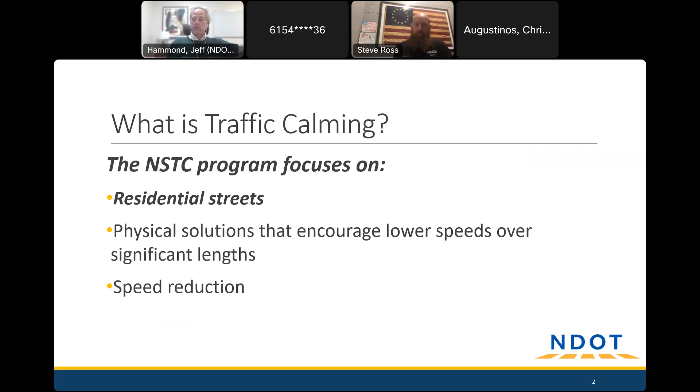We have found that nothing slows traffic down quite as effectively as that type of countermeasure. The last thing is we focus on speed reduction as opposed to trying to shift traffic off of one street onto another. That's not the intent. We get some feedback that happens, and I don't doubt it happens in some instances, but that's not our objective. We really are trying to keep traffic where it is and get it to slow down and drive in a more responsible way.

With that, we do work in the engineering world. NDOT oversees the right-of-way and can affect change on our public streets, but that's about it. We can't write tickets or do those types of things. So we have a great partnership with MNPD, but we know a lot of times they're just very limited in their resources and how much time they can commit to parking a cruiser out there and writing tickets. As much as we might like and appreciate if they would do that on these streets, they're out there doing a lot of other important work. So enforcement is another big part of this.

We know that, as is education. You may have seen some new commercials come out by NDOT having to do with speeding and the impacts of speeding - those are pretty impactful. So we're trying to target this across more than just engineering, but we're here tonight to talk about the changes in the roadway. We like to show this slide - it's kind of sobering, but it's really good information about why we do these types of projects and why there's such an emphasis, not only in Nashville but nationally, about speeding.

Our neighborhoods are places where, of course, we have drivers, but we also have a lot of walkers and bicyclists. We know that the chance of survival in the unfortunate event of a crash between a pedestrian and a car is much greater if that car is going at a more responsible speed, in the 20-25 mile an hour range.

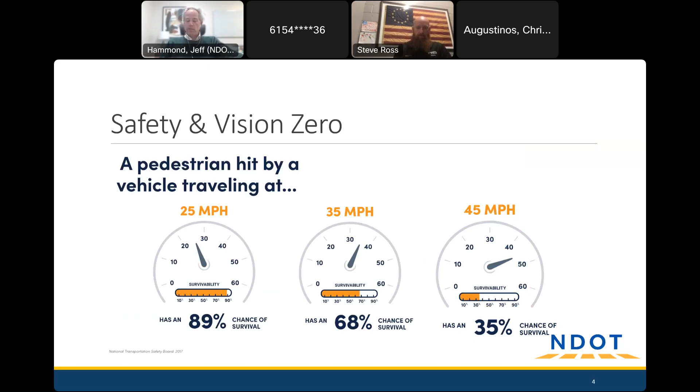Another piece of information we like to share about the program is it has been traditionally and remains very much in demand. In this cohort that Oakley's a part of, we're still sitting at about 500 applications for streets just like this one. We don't get all of those twice a year, but as we carry over, that backlog just seems to be growing. It's not really going down any, and we say that to let you know that unfortunately you're in good company in this.

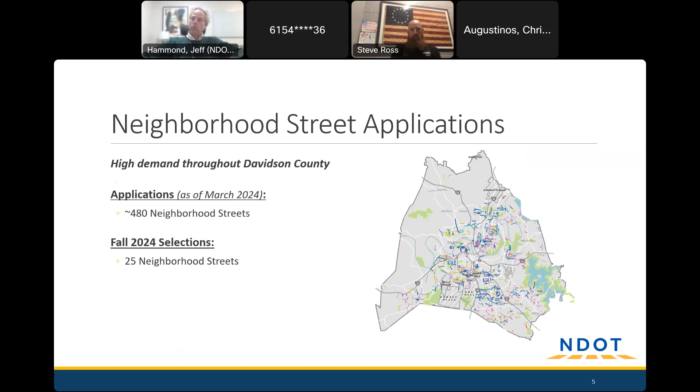If you've noticed some speeding on the street, these are all applications that have come in noting the same thing in their neighborhoods, and they're from one end of Davidson County to the other. They affect all neighborhoods everywhere. So to counter that 500 street backlog, we're doing about 50 projects a year. We do those in two different application windows and implementation cohorts at a time.

We always like to plug Hub Nashville, because sometimes in these meetings someone will say, well, can we get a stop sign, or can we get a sidewalk? Those are absolutely fine requests, and you can make those through Hub Nashville. We don't do those types of improvements in the traffic calming program, but there is a place those requests can go, and that's Hub Nashville. That's a great resource if you're not familiar with it. It's open to any resident of Davidson County, and not just for transportation requests—it touches about every department in Metro. It's kind of a one-stop shop, and you can track progress of those requests.

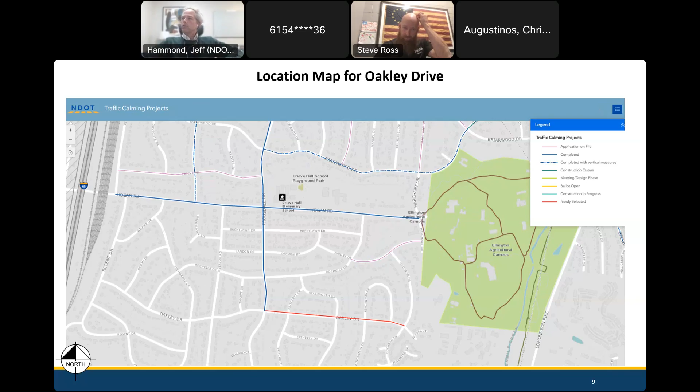Let me go now through a couple of the tools that we have in our toolkit, things that are eligible under the traffic calming program. We'll start with really the bread and butter of this program, which is speed cushions. We're using these on 95+% of the projects that we work on. I think a lot of people just think of traffic calming in Nashville as the speed cushion program, and that's okay - that is a lot of what we do.

And for good reason. We have seen over the years that we've been putting these speed cushions in that they're effective. They hold up well. They're consistent - people are getting to where they understand how to drive them, what they do, why they're there, those types of things. And that consistency is a good thing - when a street has received these, they tend to be more effective.

They're only about 3 inches tall, and then they're organized in these patterns here. Sometimes it's a series of 2, sometimes it's a series of 3 or more. The idea there is that we just want to be sure that we're going from edge to edge and not making it so that a car can drive around those and not have to drive over them.

They are tapered on the leading and trailing edge, and we can order them in different lengths. The longer the speed cushion is, the more gradual or less aggressive it is - that lets you drive over it a little bit faster. The shorter it is, it just ramps up and straight back down. We typically reserve those for more of our very urban neighborhoods - think Germantown or East Nashville or something like that, where we're bringing about a more aggressive slowing of traffic.

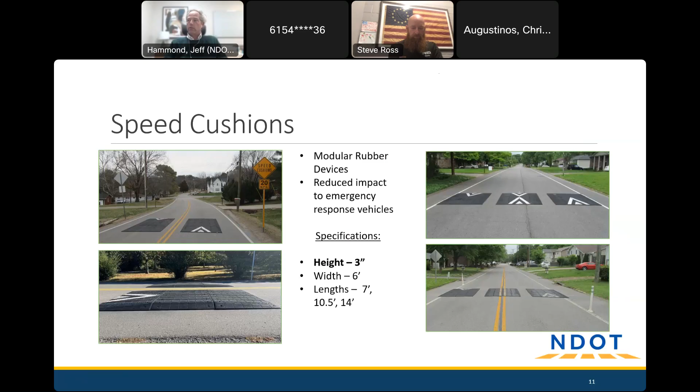We'll use a 7 foot and one of the shorter speed cushions. They're all 6 feet wide, so even very large trucks can't totally straddle them. But the reason there are breaks in them, as opposed to going all the way across, is because of the lessened impact to emergency vehicles. An ambulance or a fire truck or something really large can come much closer to straddling them and is almost not affected at all. They may have to slow down a little bit, but not like you might if you're in your Prius or something like that. For that reason, Metro has really gone to almost exclusive use of the speed cushion because of that impact to emergency vehicles, which we know is really important.

Another tool that we have is a really close cousin, and that is the speed table. That is the one that goes all the way across. It's made by the same manufacturer, and so it's got a lot of the positive aspects to it. However, it just doesn't have that break in it, and so for that reason, we're not using them very often. They have been put in parks and some things like that, maybe where sometimes emergency vehicles or access is not quite as critical.

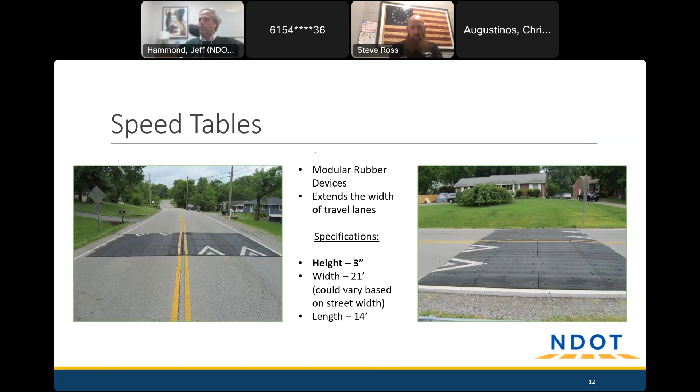There is some before and after data. NDOT is collecting more of that, but we do have some. I think most people, as they drive over these, they recognize, oh yeah, they're working, and don't need data to kind of prove that. But we have seen, as some of the earlier ones were put down, speed reductions in the neighborhood of 9 or 11 or 13 miles an hour, something like that. It really depends on where speeds were to begin with, and then the configuration and all of that. But we do have data showing that they are pretty effective.

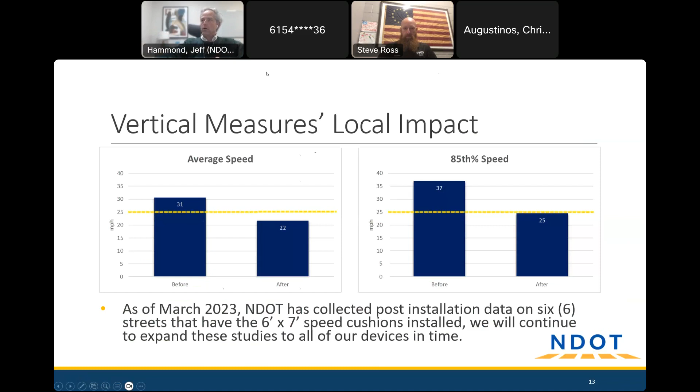Another tool that we have in our toolbox is the radar feedback sign, which is pretty self-explanatory. I know there are some already in this Crieve Hall area. Hogan Road has them, I know, and I think there's some on Trousdale here as well. Some people swear by them and say they absolutely make a difference. Some people say, yeah, they start out good, but as people get used to them, they may not be as effective.

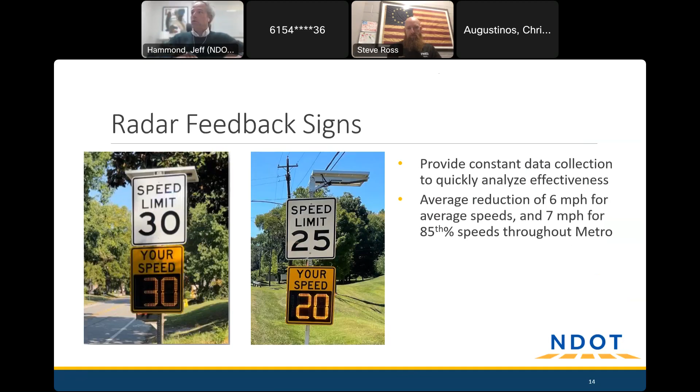So some of that data is still being collected as well. We do have good before and after data in the short term saying that they are very effective. I think the question is that longer term effectiveness. We will use these a lot of times when we can't use something like a speed cushion. Trousdale, for example, it's just got too much traffic. So, as I mentioned, we will do speed cushions up to 5,000 cars a day. Trousdale's more than that, and so we might use a tool like this just to give a good reinforcement back to the driver that, hey, you're going a little fast or whatever. Sometimes we'll also use these in places where we can't otherwise get a speed cushion, like steep hills, sharp curves. Some of the streets we work on just have one driveway after the next, and it's really hard to get in a speed cushion without blocking somebody's driveway, which we don't want to do. So there are some instances like that where this can be a good stopgap measure.

Another thing that we will look at is the pavement markings on the street, with the idea that sometimes on very wide streets, pavement width, wide streets, if we can visually narrow those, even by just using some painted stripes, sometimes that will have an impact in helping drivers to go slower. So we'll look at that as well.

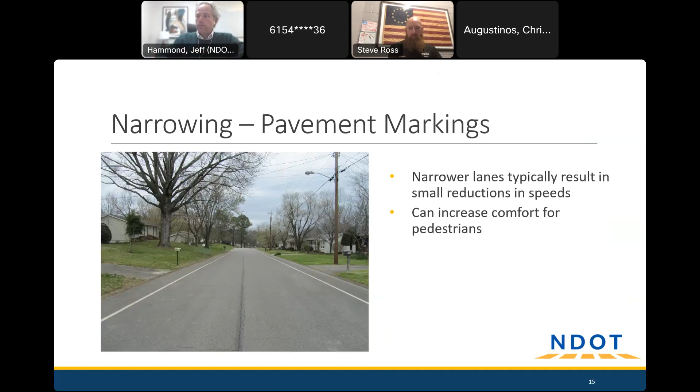Kind of an extreme example of that is in more urban areas. We'll look at some of these bigger intersections from a bulb out standpoint, trying to narrow the street so that some of these intersections, which were built with big sweeping or wide radiuses that kind of invite cars to enter the road quickly, if we can narrow that down, we'll do that using bulb outs like you see here. But again, that's for a lot of where you have a lot of pavement, and usually more urban areas where you have a lot of pedestrian activity and those types of things.

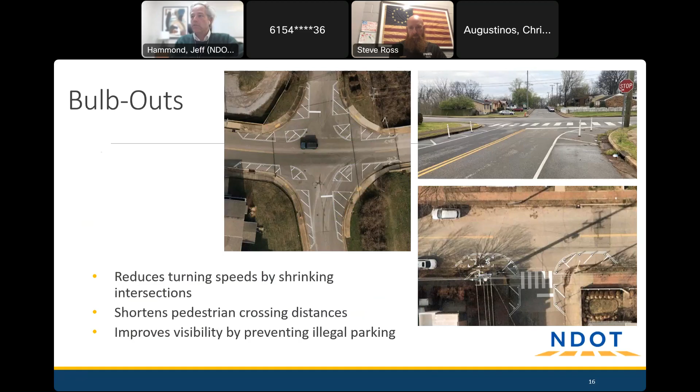Chicanes is one that is really specialized. There's only 2 or 3 of these in all of Davidson County.

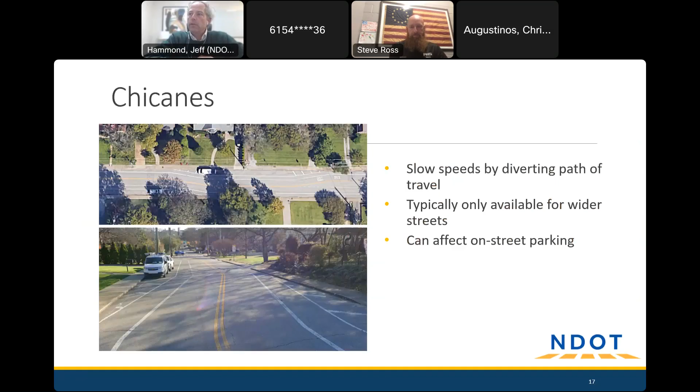And it really introduces an artificial meandering of the street, and creates some turns that drivers have to follow. It works okay if there's parked cars like you see here. I think this is probably on Fairfax down in the Hillsboro Village area, but it kind of takes some special conditions for that to be a good fit for a street.

And then traffic circles, we'll do these occasionally. They've kind of gone in fits and starts here in Metro. There are some out there that you'll see. These have some real complications sometimes for school buses, for instance. Really large vehicles can have a problem navigating around these. So we're still working with NDOT on what some of those policies need to be in the design standards for using a traffic circle. It takes an awful lot of pavement in an intersection for that to even fit, but it can be a good tool in some cases.

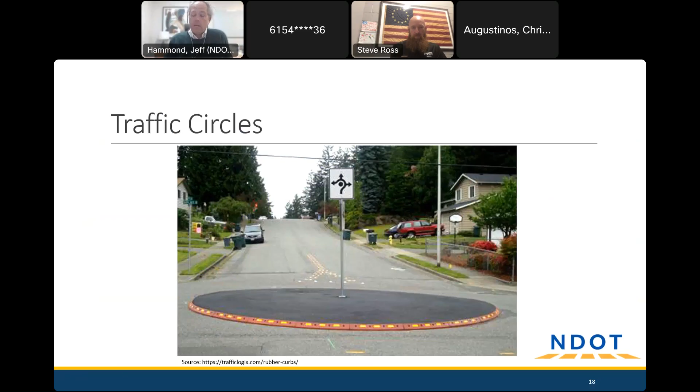So here's where we like to start with you all on your street, and just show you again our very preliminary thoughts on what a project might consist of here on Oakley. Now, Oakley's an interesting one. I mentioned it's kind of narrow, and that's a good thing for us, but it's also got some hills, as you all know. And so one thing I tried to do is kind of highlight those areas.

So you see a yellow bar here in some of these areas that we haven't been out on site yet. We'll do that in the next step, but just using Google and all, we can tell we're probably going to exceed our thresholds for where we can put speed cushions on this street. So just keep that in mind. As you see that yellow part, that just means there's a pretty significant grade there, and we are aware of that.

So looking at this image, you see Trousdale on the left-hand side of your screen where the little stop sign is, and Oakley is the purple line that runs through over to Cochran at the right-hand side of your screen. What we are proposing with those three little yellow trapezoids there are three sets of speed cushions in between there, in more of the flat areas where we can get those in.

How we come up with that is we will look at the total length of the street. In this case, as I mentioned, it's a half mile, and I mean almost exactly a half mile, 2640 feet, and then we will take that and divide it by what we like our spacing to be for speed cushions. So we know that if we can get something like 400 to 600 feet, typically, maybe a little longer in more suburban or rural areas, maybe a little shorter in urban areas, but something in that ballpark of around 600 feet, that'll be a good spacing for us.

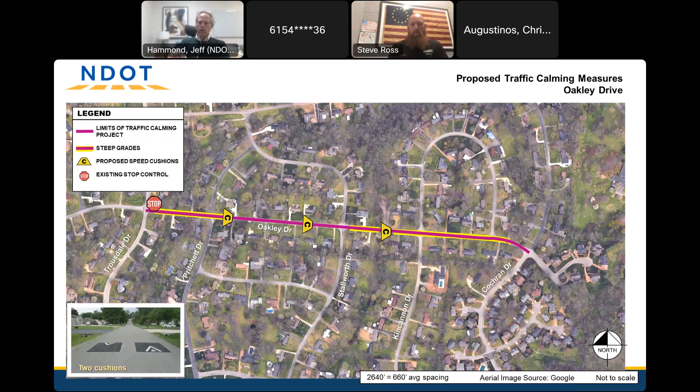We've got one other tool that I want to show you here that is brand new, really making its debut on this project. I think it may help us with some of that feedback. But after tonight, we'll move into the design phase.

Once we close this feedback stage, we'll come out, walk the site, take measurements, and really hone in on where exactly we would propose the speed cushions. We'll develop a set of design plans and post those online so everybody has access. Then we can decide whether we need to get back together for a second meeting.

It used to be mandatory, but we were finding that 80% of projects would come back a couple months later to a second meeting and people would say, that's what you showed us last time, you didn't really change anything. And they were right. So NDOT said, let's make that optional. If there's a lot of concern in the neighborhood, we'll happily do a second meeting, but if everybody's pretty good with it, we just move on to the ballot process.

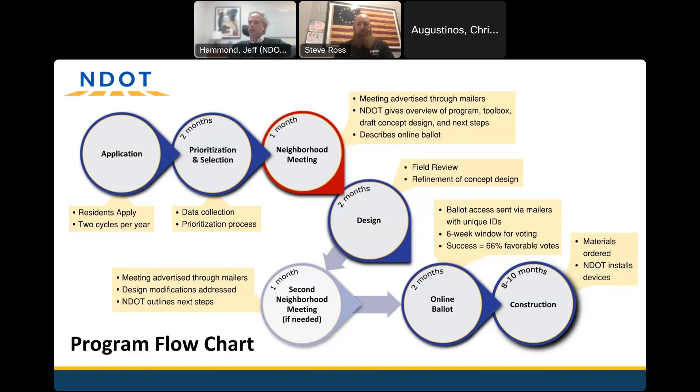So the ballot process: everybody who lives or owns property on the street will get one of these cards when it comes time to do this. You'll scan it, put in some information, and then vote if you're for it or against it. What we're looking for is 66% of voters, not everybody on the street but of the people who vote, 2/3 of them need to be in favor of it to move the project forward. We keep that open for 6 weeks.

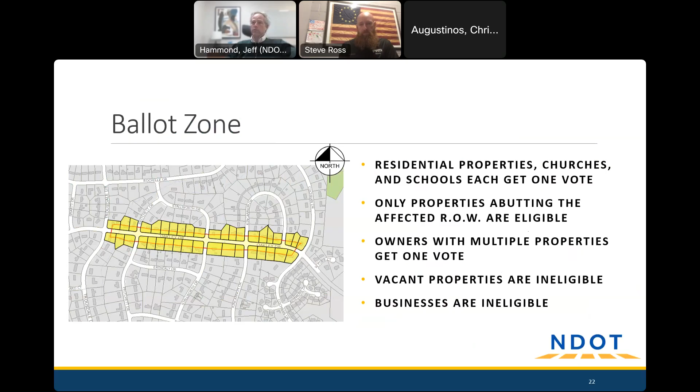But that's it, as far as the voting process, it's pretty straightforward. On NDOT's website, they do have a record of how votes have gone, so you can see every neighborhood that has voted and whether it passed or failed.